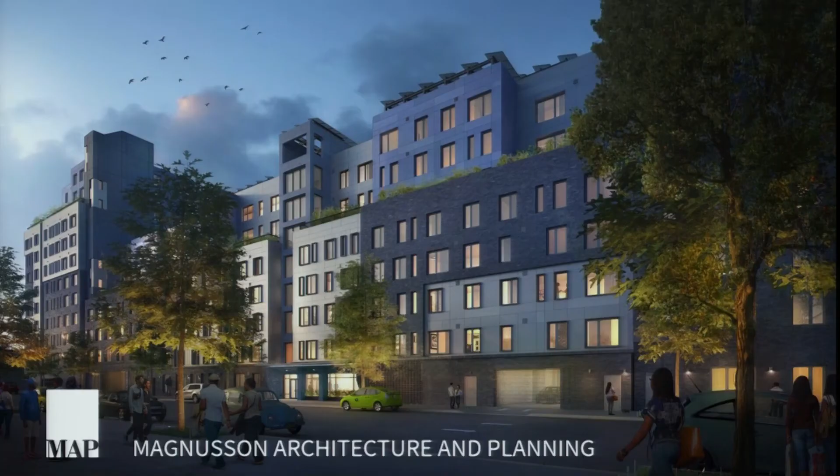Hi everybody, it's wonderful to be here. MAP is a purpose-driven firm, meaning we support the mission of our clients to provide healthy, safe, and affordable housing. For over 30 years, we've been part of the active growth in healthy and energy-efficient architecture, which I think we should all celebrate, and which is central to supporting our clients' missions.

We are seeing widespread implementation of electric heat pump technology for hot water. Of these 7 Buildings of Excellence projects, all are electric except for one from round 1 of the program. In fact, another round 1 project that still had gas when awarded has now switched to all-electric heat pump during construction, partly to avoid gas infrastructure upgrade requests by National Grid and to align the building with our swiftly emerging carbon-neutral future. In 2021, our firm alone had 13 projects that were all-electric in design and only 2 projects that still had gas domestic hot water.

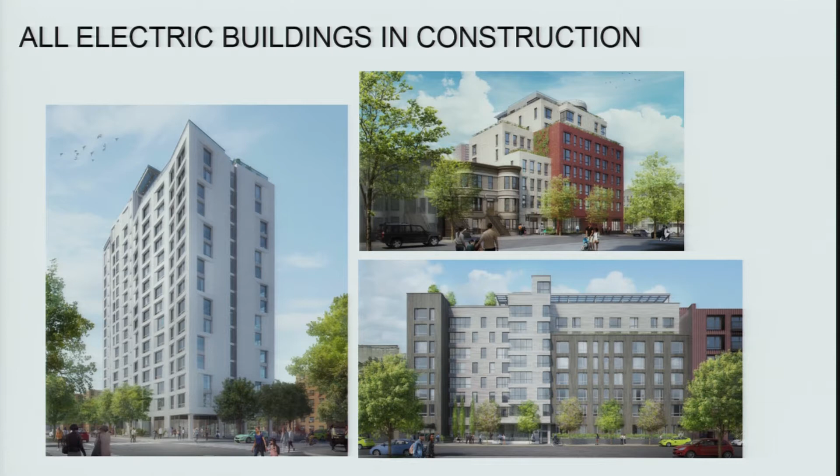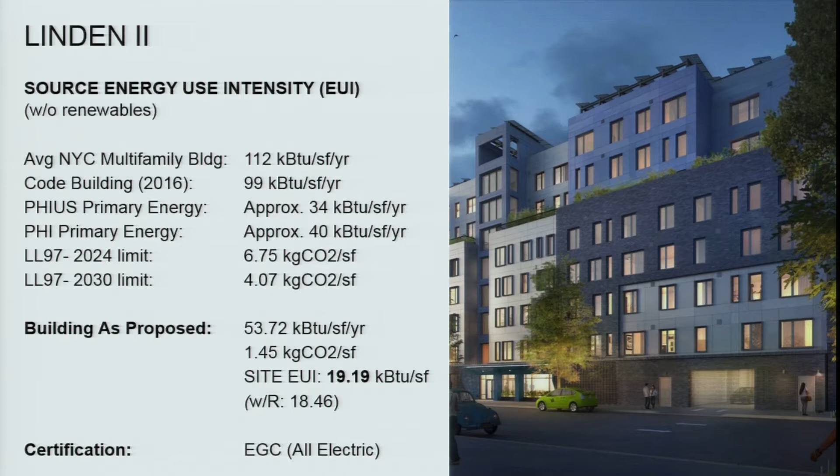Here are 3 of those all-electric buildings currently in construction. This project, Linden 2, is part of a 3-phase development encompassing a full city block in Linwood, Brooklyn. The first phase is completed and was not part of the Buildings of Excellence competition. However, the second phase was a winner in the first round. It's an 8-story, 160-unit, 100% affordable multifamily project, and it's fully electric and nearly completed.

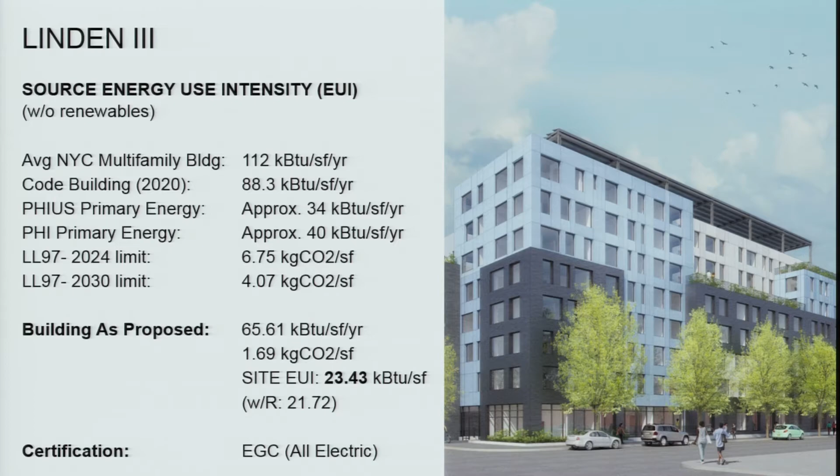Linden 3 is the 3rd phase in this development and was a 2nd round winner. It's also 8 stories, 100% affordable multifamily housing, and it's fully electric, with foundations almost complete.

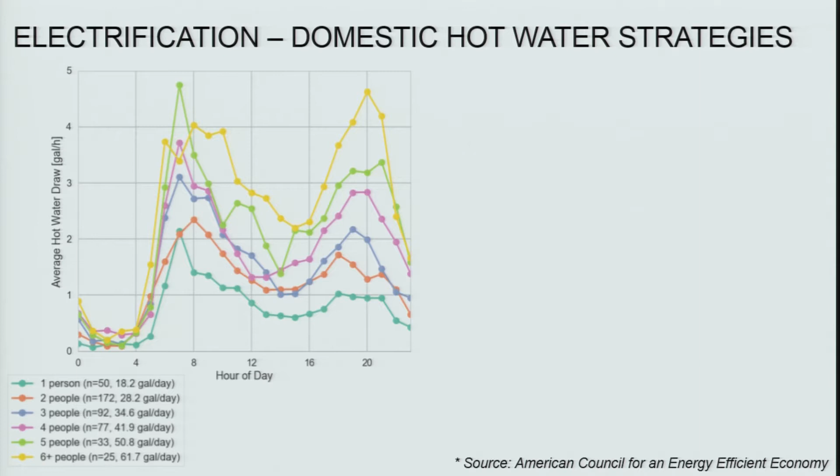As you're probably aware, accommodating the peak hot water demand load for multifamily buildings is different with a heat pump. There are typically 2 peaks, one in the AM and one in the evening. Most gas systems work in real time to accommodate those peak loads. Heat pumps are far more efficient, but they work more slowly over time and cannot respond as instantaneously to those demands, so these systems require substantial hot water storage capacity, enough to accommodate that entire peak load.

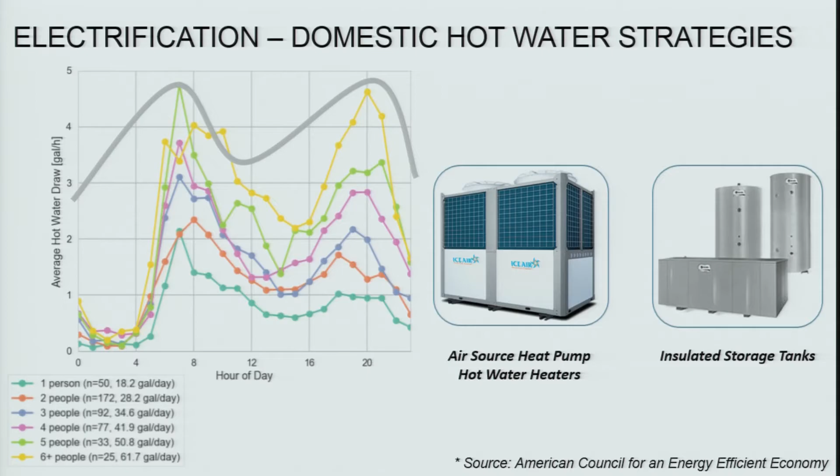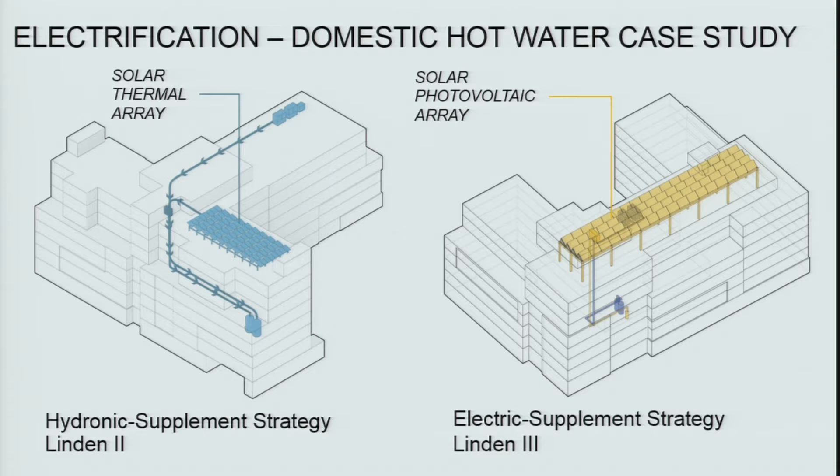So with a heat pump hot water system, we are also becoming better grid citizens and can contribute to demand response strategies. These 2 buildings each have different ways of supporting the domestic hot water system: one has a solar thermal array that directly heats the water for the storage tanks, and the other has a PV array that provides renewable power to the heat pumps. We are looking forward to comparing the performance of these 2 systems in the buildings right next to each other.

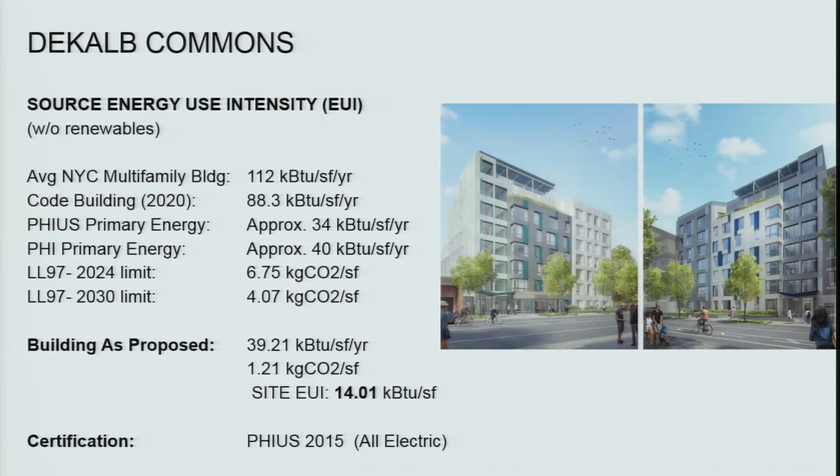Another all-electric project is DeKalb Commons. It's an affordable housing development for families, providing studios through 3-bedroom apartments. It's located in Brooklyn and comprised of 2 7-story buildings across the street from each other. The owner is St. Nick's Alliance in partnership with Bed-Stuy Restoration. Our energy target is 2015 PHIUS certification and starts construction next year.

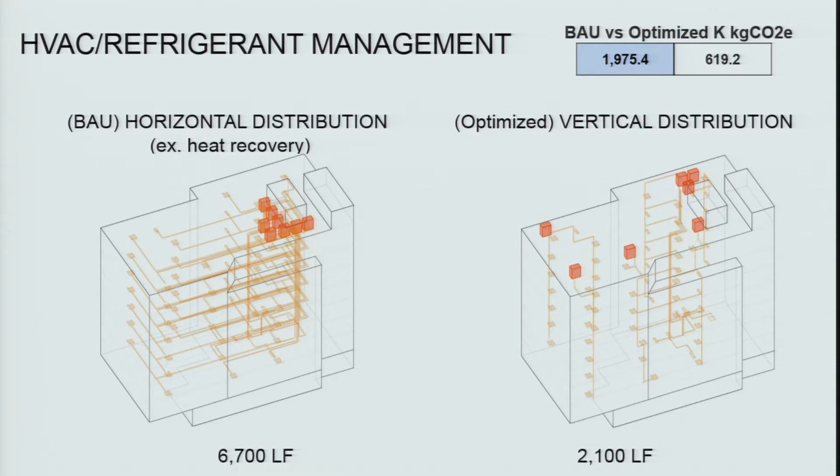In a split VRF system, there is always the assumption that there's a small amount of leakage, although we don't have great data on that. Therefore, reducing the lengths of your refrigerant lines not only saves upfront costs, but it will also reduce the risk that our electrification systems will backfire from a global warming perspective.

We are looking always to specify a CO2 refrigerant in our domestic hot water systems.

This is the Rise, which is located in Brownsville, Brooklyn, and being developed by Xenolith Partners. It's a 7-story building with 72 dwelling units, both affordable and supportive, and a 1,300 square foot community facility office space at the ground floor and cellar.

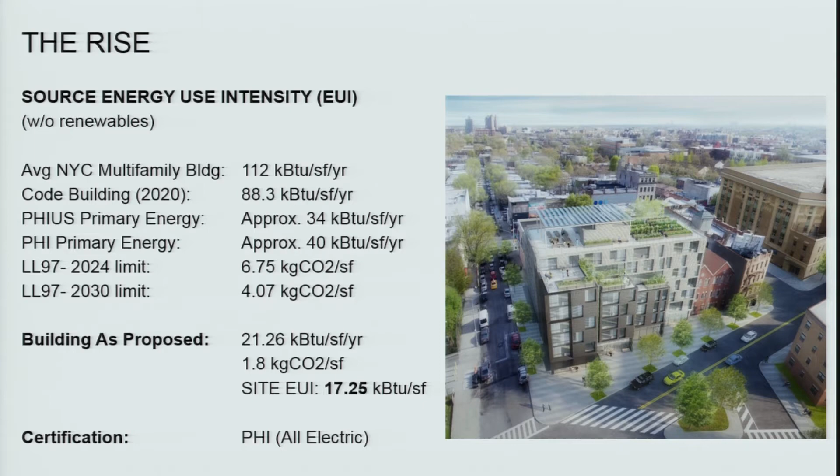The building is CMU block and plank with precast plank and a brick facade, and we'll just start construction this fall. It's also all electric, and the passive house features in it are critical to providing the health and wellness strategy for this project.

It seeks to support justice-involved families who will live here. There are multiple services and amenities, including 4 outdoor terraces and urban farming, and the no fossil fuel combustion on site will ensure we're truly providing healthy homes.

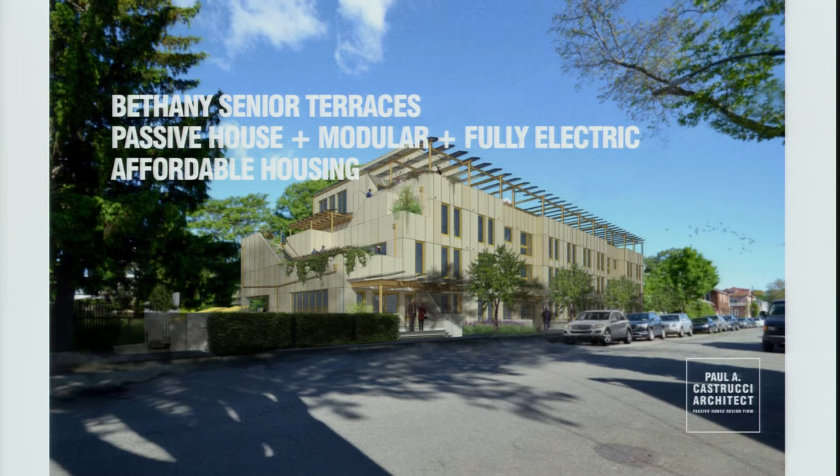So today we're talking about Bethany Senior Terraces, which is a project we're really proud of, working with another presenter here, Ryan, and RiseBoro Community Partnerships. It's a modular passive house, fully electric, affordable housing for seniors building, slated to start construction at the end of the year. It's in Brooklyn.

And then added on that, when we're talking about electrification, electricity is expensive. So as we're electrifying our buildings, which we think we need to do, we want to make sure that they're really efficient, so we're driving down the cost of operating those buildings.

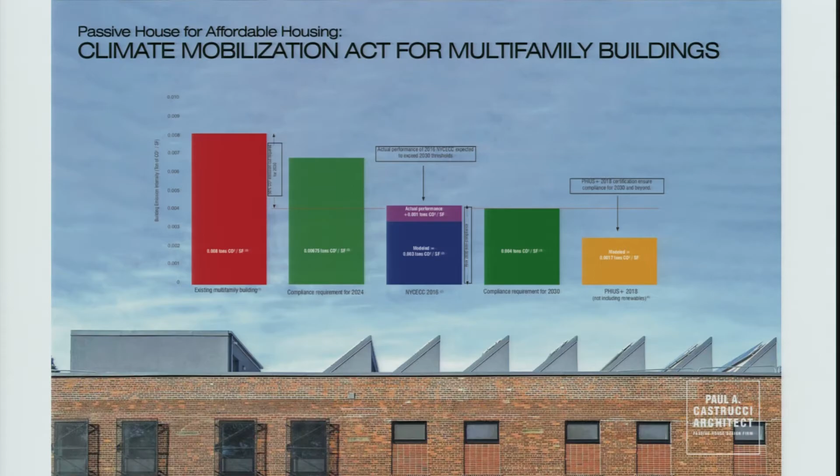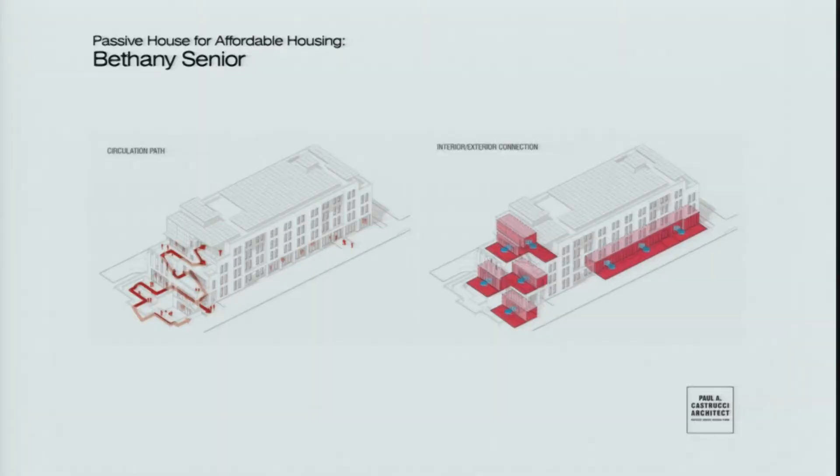So here we are, Bethany Senior at Flatbush area of Brooklyn. The building is about 40,000 square feet, 58 units. The energy metrics - it is going to be Passive House certified, and it's using about half as much of the allowed carbon for the 2035 plus allowance from the calculators online.

As I said before, it is a modular building, so we're looking to lean into that and begin to carve away some modules on the south side of the building to create a continuous walking loop, an activity loop, and also indoor-outdoor terraces.

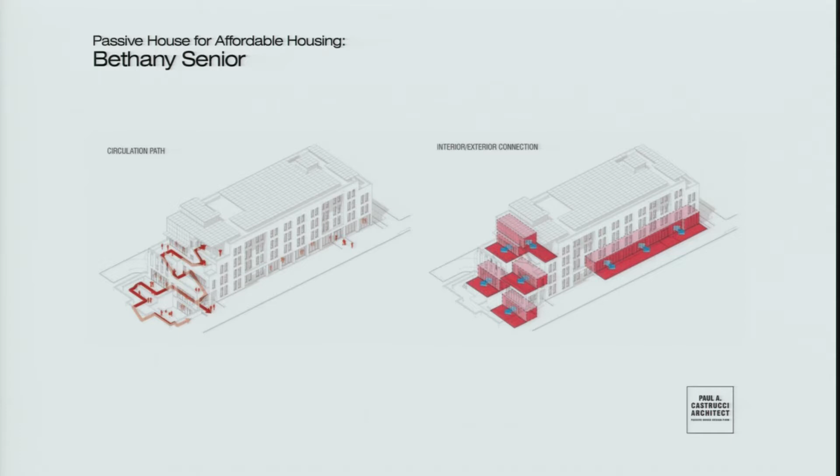Because we care a lot about sustainability, and of course that's energy, but a bigger part of sustainability is that people want to be in the buildings, that they're happy there, that they're comfortable there, that they love living there, and that it's a building they want to preserve and sustain. So here we're looking at the features of the building, the south side, all these indoor-outdoor spaces, creating really just a place that people want to be.

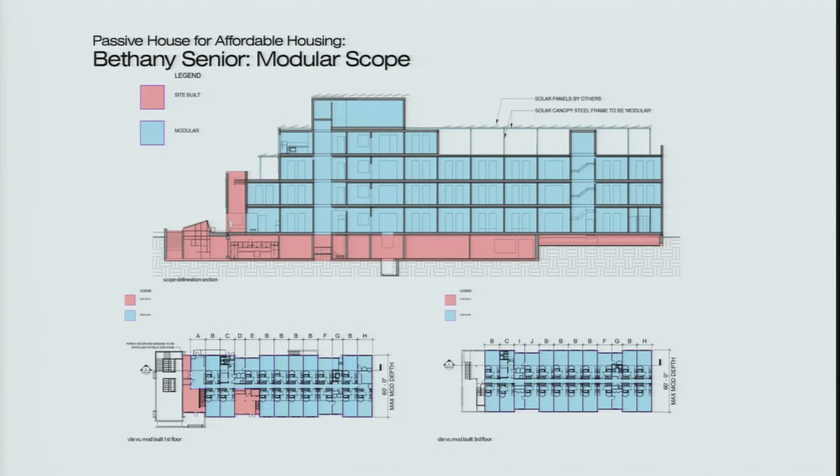As I said, again, a modular building. Here we're just looking at the scope delineation of what's modular and what's not, maybe not as relevant for this group. But that thinking in modular terms really did play into our approach to MEP, which is the electrification, and specifically looking at the ERV system.

So typically you would have a centralized system, an ERV system, which is the energy recovery ventilation system. Typically we would centralize that, that's what we typically do in buildings, but here it made more sense to do it with each module getting its own. Then we just have to think about where's the exhaust going out, where's the supply coming in, making sure those are properly located.

And the other complication with that is that you are placing the units inside, so you have to be able to get in to maintain them. I think in this case it's seen as an opportunity to check in on elderly residents, but that would be another consideration of that approach.

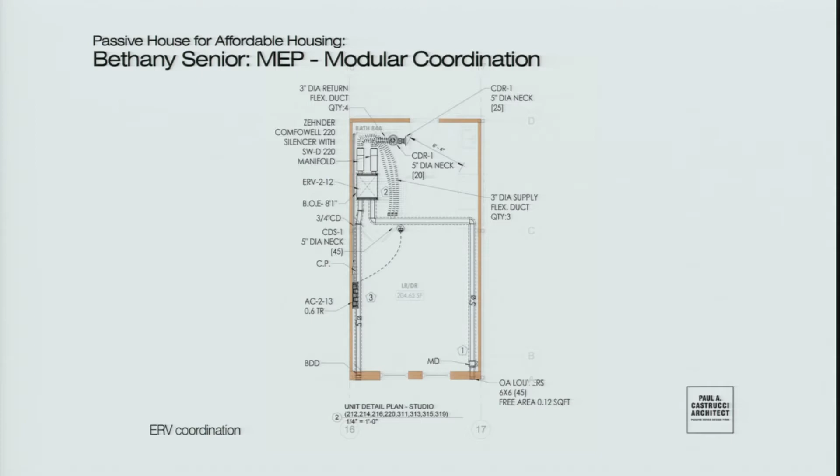Okay, hot water. This is our first time - we have done electric hot water on small buildings before, one to two family buildings, it's quite easy. You do a heat pump hot water heater, you throw it in, it's very easy, it's known, people have done that all over the place. This is our first chance at going electrified hot water at a medium or larger scale.

And so our approach here, we've actually gone through three different iterations. The first was - I have to check my notes here, I don't want to say the manufacturer - but the first was essentially an air source heat pump on the roof. We used a hydronic non-potable loop to run between that into an interior hot water tank, sort of that battery that Sara had referenced.

Then we looked at - and Ryan may talk a bit more about this - the idea of using heat recovery off that. So we have VRFs to heat and cool the building. How can we use some of that waste energy to heat the hot water? So we looked at that, but that ended up being too costly for the project.

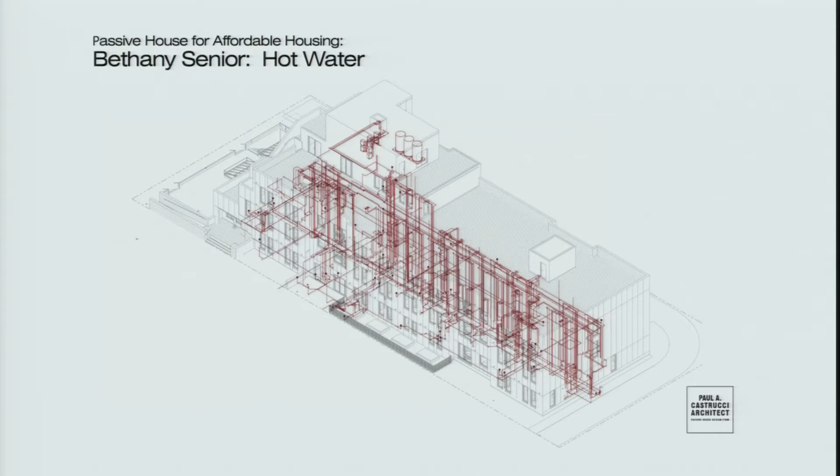And so our final solution, where we ended up, was with a CO2-based modular unit. They're pretty small, 15 MBH each, and you add as many of them together as you need to get up to the load. Ours ended up being 9 of those units, located at the roof.

With this particular unit, you get rid of that non-potable hydronic loop between the systems - essentially the water passes right over the coil. But that means the heat pump needs to be very close to the hot water tank.

So just before I wrap, this is a typical passive house detail. And again, I just want to underline the point on electrification: as we're electrifying, the way I see it, the real work in making affordable electrical buildings is really driving down the cost to operate the buildings. Electric is more expensive, so we need to make really efficient buildings and drive down that cost.

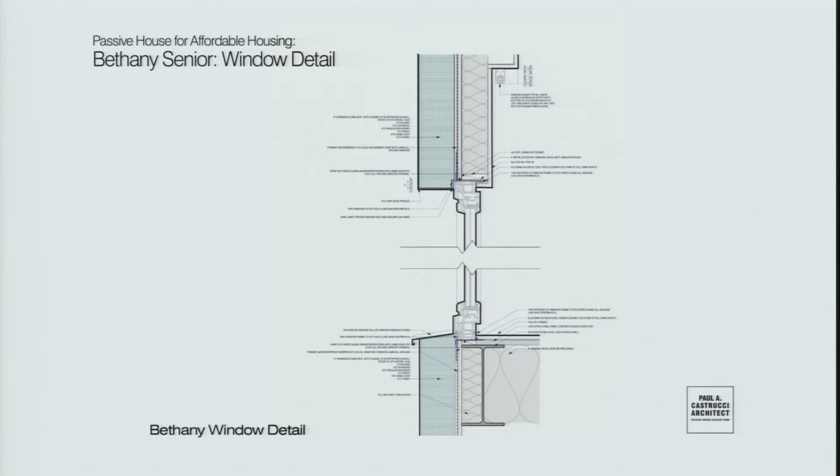And then also look at how can we begin to get policy to change around things like solar storage, leverage demand response, time of use, and things like that to really capture all the savings on the cost side of these electrified buildings. So with that, I think I thank you for your time. I'm going to turn it over to Ryan.

Hi, I'm Ryan Cassidy from RiseBoro Community Partnership. It occurs to me as I listen today to all the really smart architects and engineers that my job's a little bit different from those folks. It's really to keep responsibility with contractors and our development team to deliver these types of projects.

And so we don't value engineer any of our passive house things. We don't value engineer hot water systems when we develop them. It's really about keeping pressure on contractors to deliver what we want. And so that's sort of my role at RiseBoro. So this is Bushwick Alliance.

It's a 20-unit multifamily affordable housing project developed with RiseBoro and St. Nick's Alliance and designed by STAT Architecture. It was the winner of NYSERDA's Buildings of Excellence Round 1. It's passive house compliant, low carbon, and fully electric.

The big thing here on low carbon was just getting a concrete mix that had less embodied carbon, and that ended up being pretty easy to do. We were able to deliver that at no added cost, and all it took was a bunch of conference calls and complaining from contractors and things like that. But it was zero cost, and we said we were going to do it, and we pursued it through the end. So that was good.

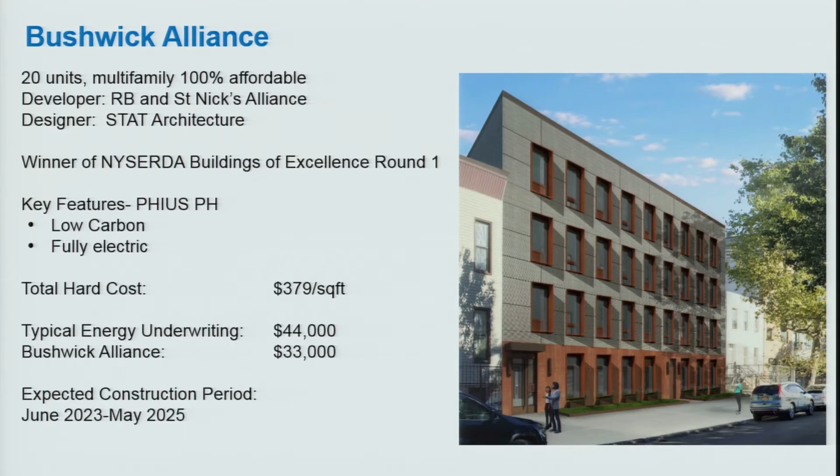In this typical case, it's a small building, but our underwriting would normally be like $44,000 a year, and we're able to underwrite to savings at $33,000. So it's a good amount of savings that even $11,000 can be leveraged into a nicer debt sizing or less subsidy, depending on the approach.

So that's great. And then we are expecting to get into construction in June. That's today. We're going to close probably later this month.

So here's our hot water strategy. We've done a lot of passive house, so for us this wasn't a question of whether or not we could do passive house or anything else. It was really how do we incorporate electric hot water. And of course, with PCA and the project Grayson just presented, we've got now two of those in our pipeline. So it's a similar system.

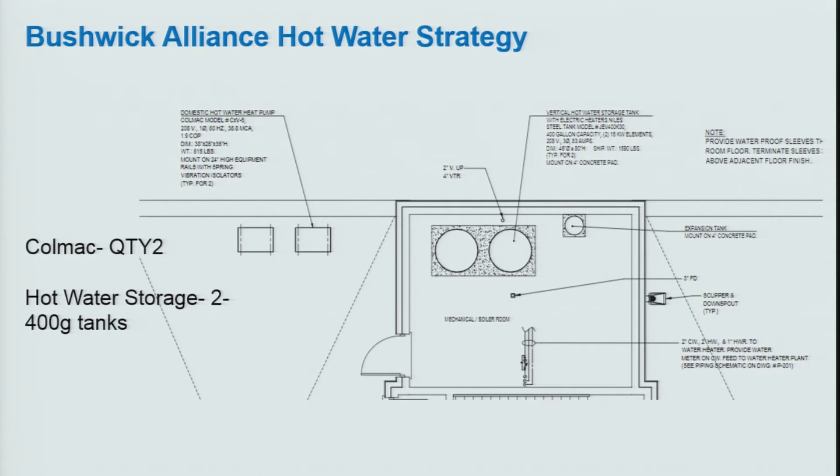It's a Colmac water heat pump, and we've got 2 storage tanks at 400 gallons for the 20 units. It's located on the roof in a mechanical room, so nothing really unique there. And then this is sort of our condenser layout along with our hot water heaters.

So it's something that we haven't managed before. RiseBoro also manages the properties we own, so we have about 2,000 units under management. This is kind of our first foray into what this might look like. And so we didn't take a lot of benefits if I were to go back to the underwriting. Most of the underwriting benefits we took were just on the energy performance.

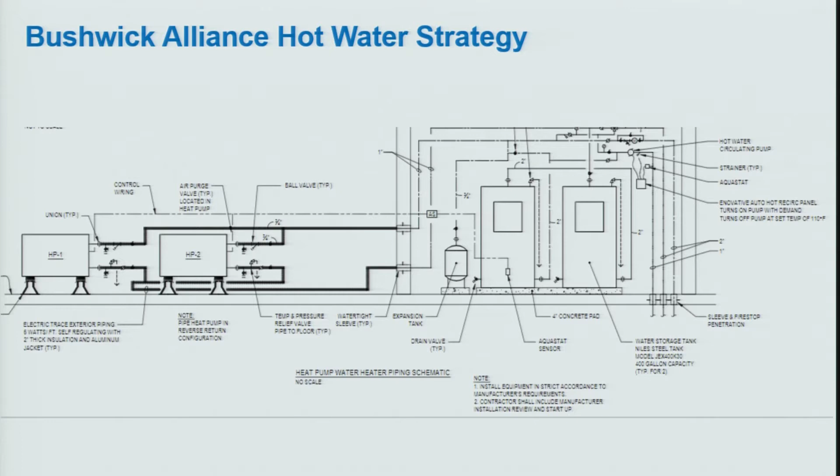We wanted to stay really conservative on our hot water assumptions, both for efficiency and for the Con Ed rates, which are going up. So as we approach these projects for the first time, we like to stay conservative on things that are new to us, and then we continue to pursue passive house cost savings that we're familiar with. So that's why we can land at those numbers. We're excited about the project to get in the ground along with the PCA modular project, and look forward to talking a little bit more.